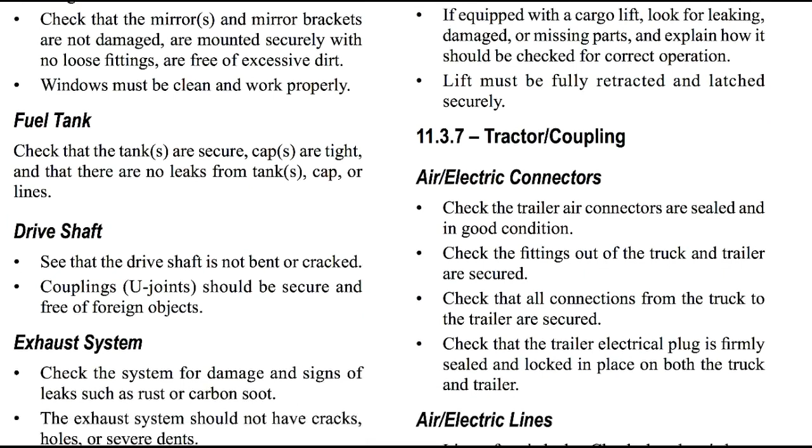Fuel tank. Check that the fuel tank is secure, the cap is tight, and that there are no leaks from the tank, cap, or lines.

Drive shaft. See that the drive shaft is not bent or cracked. Couplings and U-joints should be secure and free of foreign objects.

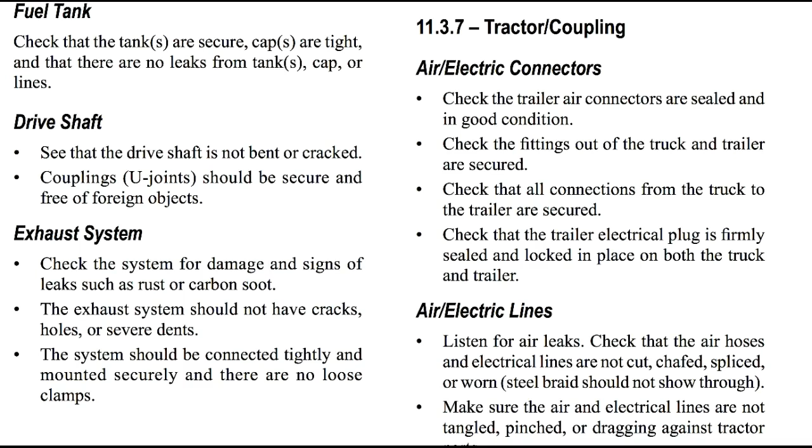The exhaust system, which is important. Check this system for damage and signs of leaks, such as rust or carbon soot. The exhaust system should not have cracks, holes, or severe dents. The system should be connected tightly and mounted securely, with no loose clamps.

Frame. Look for cracks, broken welds, holes, or other damage to the longitudinal frame members, cross members, box, and floor.

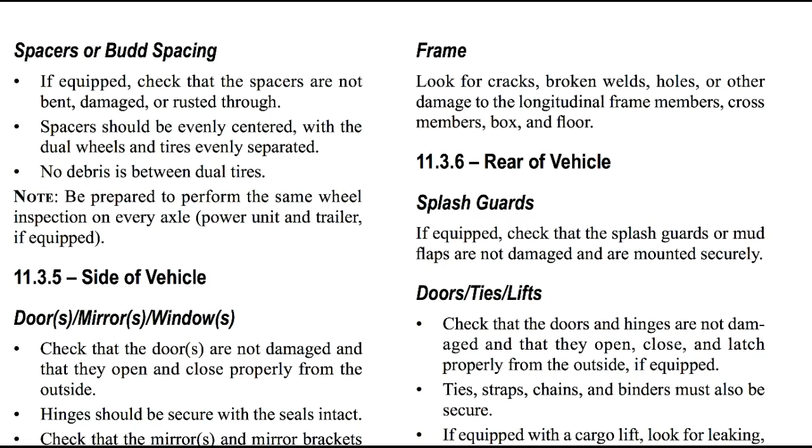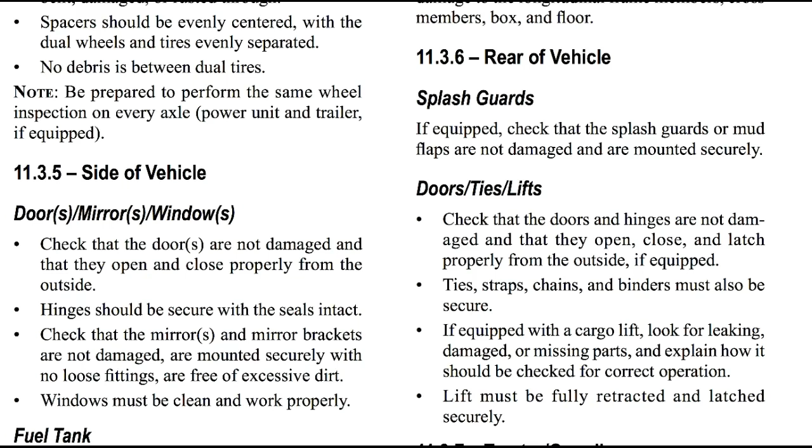Splash guards. This is at the rear of the vehicle. When you're at the rear of the vehicle, check your splash guards. If equipped, check that the splash guards or mud flaps are not damaged and are mounted securely.

Now the doors, the ties, and lifts. Check that the doors and hinges are not damaged and that they open, close, and latch properly from the outside, if equipped. Still at the back of the truck.

Check your ties, straps, chains, and binders. They must be secure. If equipped with a cargo lift, look for leaking, damaged, or missing parts, and check for correct operation. The lift must be fully retracted and latched securely.

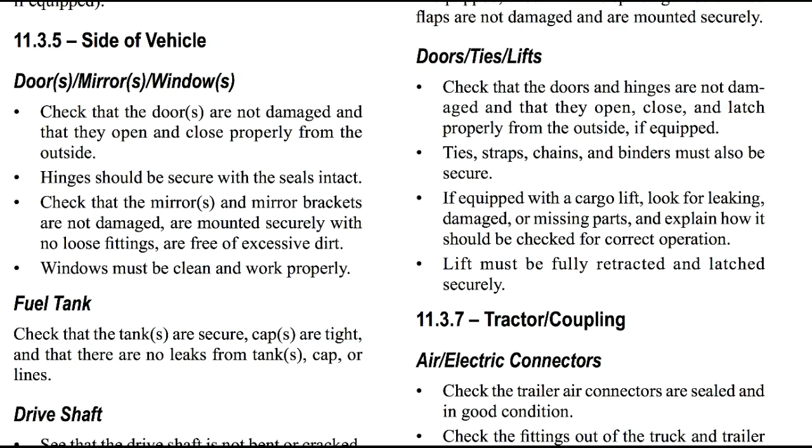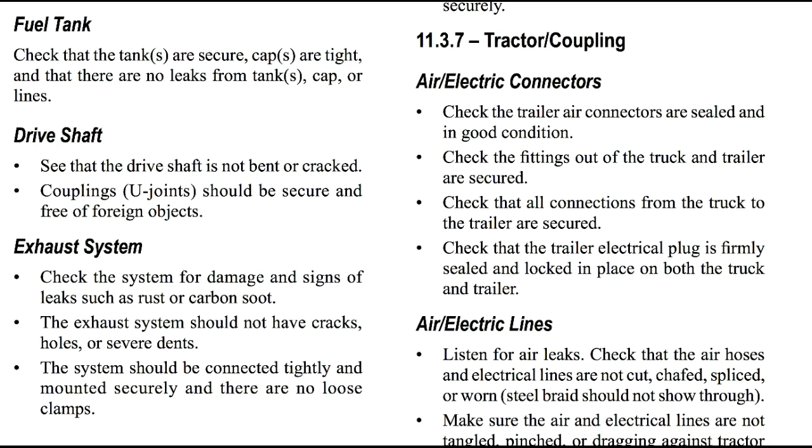Now you're looking at your tractor coupling, air and electric connectors. Check that the trailer air connectors are sealed and in good condition. Check that the fittings on the truck and trailer are secure, and that all connections from the truck to the trailer are secured. Check that the trailer electrical plug is firmly sealed and locked in place on both the truck and trailer.

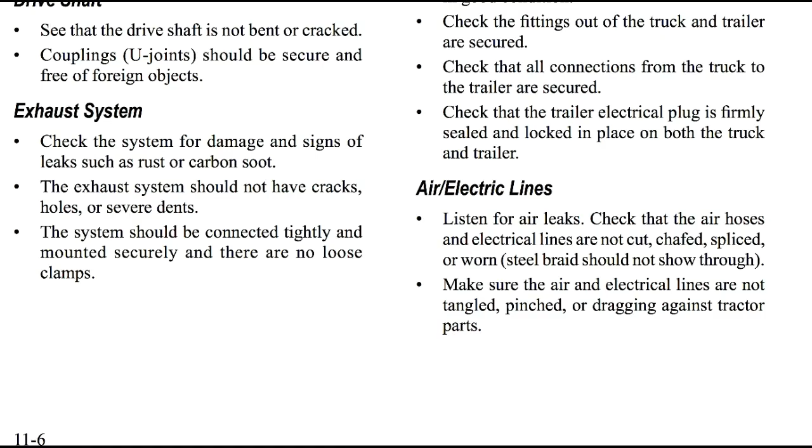Air electric lines. Listen for air leaks. Check that the air hoses and electrical lines are not cut, chafed, spliced, or worn. Steel braid should not show through. Make sure the air and electrical lines are not tangled, pinched, or dragging against the tractor parts.

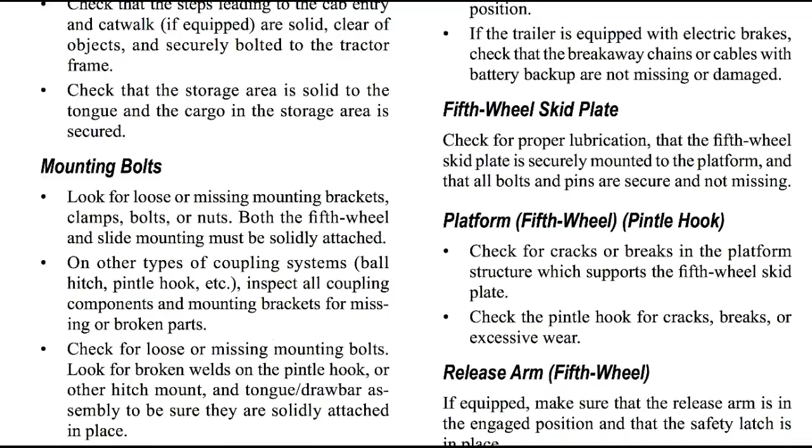Catwalk steps. Check that the catwalk is solid, clear of objects, and securely bolted to the tractor frame. Check that the steps leading to the cab entry and catwalk are solid, clear of objects, and securely bolted to the tractor frame. Check that the storage area is solid to the tongue and that cargo in the storage area is secured. Mounting bolts: look for loose or missing mounting brackets, clamps, bolts, or nuts.

Both the fifth wheel and sliding mount must be solidly attached. On other types of coupling systems, like the ball hitch, pintle hook, etc., inspect all coupling components and mounting brackets for missing or broken parts.

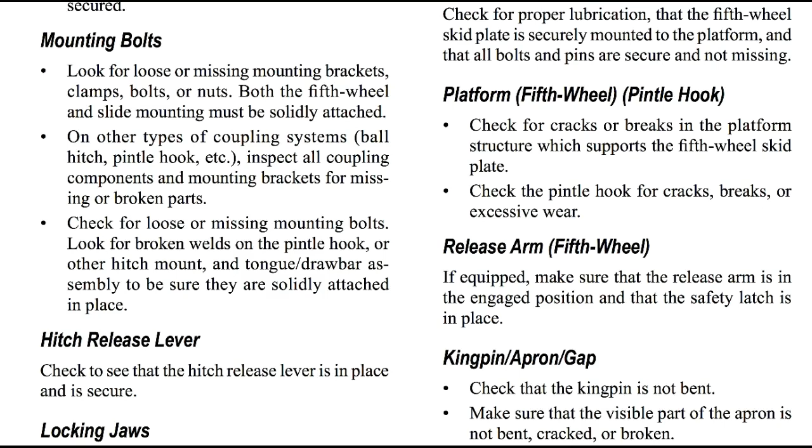Check for loose or missing mounting bolts. Look for broken welds in the pintle hook or other hitch mount, and tongue drawbar assembly, to be sure that they are solidly attached in place.

The hitch release lever. Check to see that the hitch release lever is in place and secure. The locking jaws: look into the fifth wheel gap and check that the locking jaws are fully closed around the kingpin. On other types of coupling systems, like the ball hitch, pintle hook, etc., inspect the locking mechanism for missing or broken parts and make sure it's locked securely.

If present, safety cables or chains must be secure and free of kinks and excessive slack. The safety devices: check that the latch is secured and locked in place, and that the cotter pin is not missing, is in place, and not damaged.

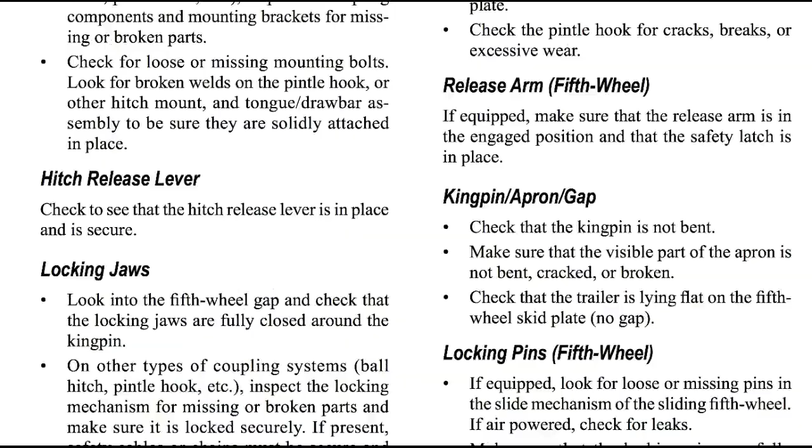Safety chains must be hooked and crisscrossed, free of kinks and excessive slack. Cotter pins to hook must be in place, with the hooks secured and pointing in an outward position. If the trailer is equipped with electric brakes, check that the breakaway chains or cables with battery backup are not missing or damaged.

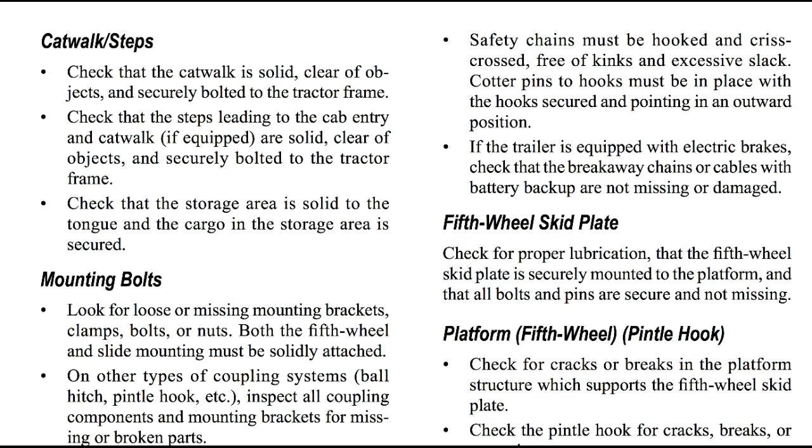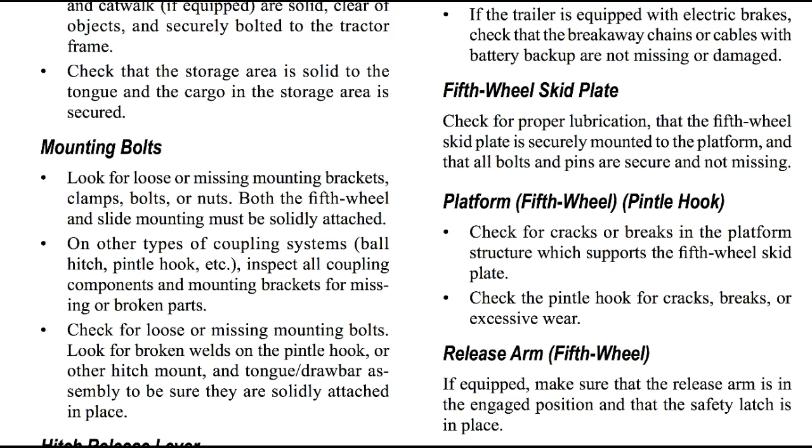And the fifth wheel skid plate: check for proper lubrication, that the fifth wheel skid plate is securely mounted to the platform, and that all bolts and pins are secure and not missing.

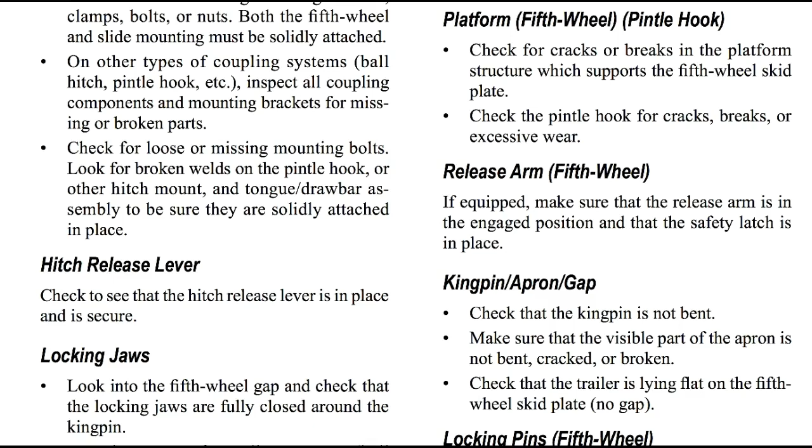Platform fifth wheel pintle hook. Check for cracks or breaks in the platform structure which supports the fifth wheel skid plate. Check the pintle hook for cracks, breaks, or excessive wear, and the release arm on the fifth wheel. If equipped, make sure that the release arm is in engaged position and that the safety latch is in place.

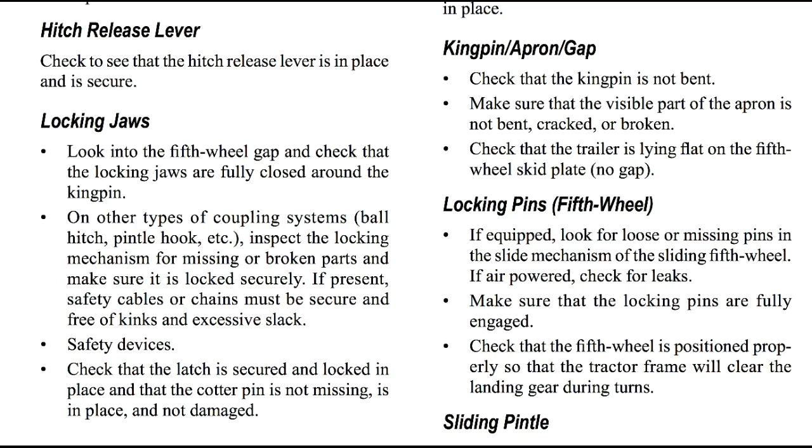Kingpin apron gap. Check that the kingpin is not bent. Make sure that the visible part of the apron is not bent, cracked, or broken. Check that the trailer is lying flat on the fifth wheel skid plate with no gap.

Locking pins on the fifth wheel. If equipped, look for loose or missing pins in the slide mechanism of the sliding fifth wheel. If air-powered, check for leaks. Make sure that the locking pins are fully engaged. Check that the fifth wheel is positioned properly so that the tractor frame will clear the landing gear during turns.

Sliding pintle. Check that the sliding pintle is secured with no loose or missing nuts or bolts and that the cotter pin is in place.

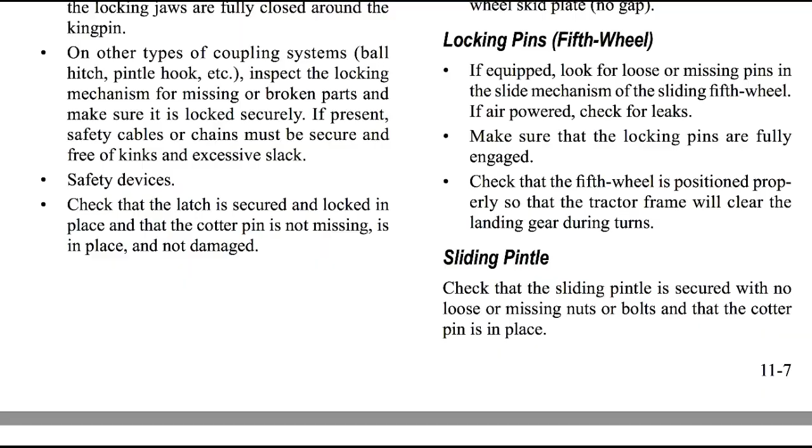Tongue and drawbar. Check that the tongue drawbar is not bent or twisted and check for broken welds and stress cracks. Check that the tongue drawbar is not worn excessively.

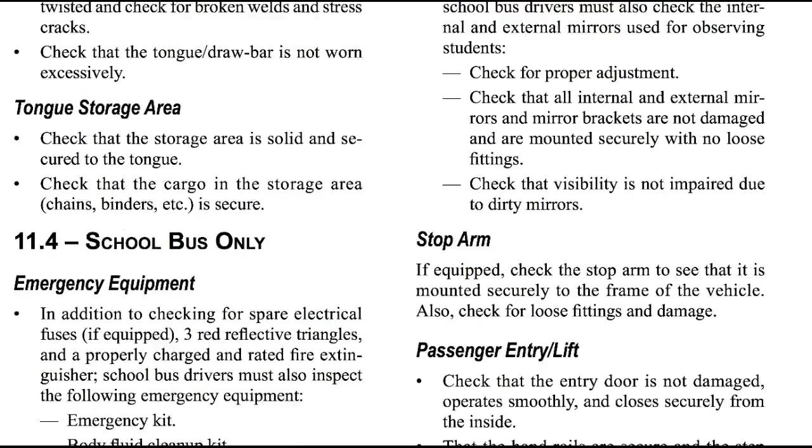Tongue storage area. Check that the storage area is solid and secured to the tongue. Check that the cargo is in the storage area, like chains, binders, etc., and check that they're secure.

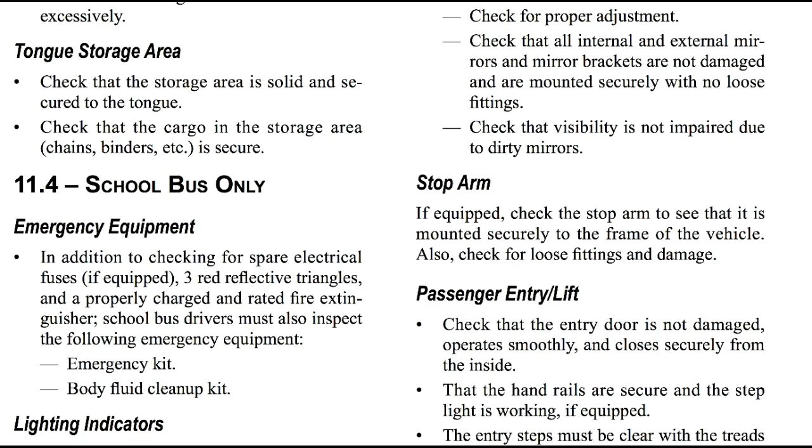Now for school buses only. Emergency equipment. In addition to checking for spare electrical fuses, 3 red reflective triangles, and a properly charged and rated fire extinguisher, school bus drivers must also inspect the following emergency equipment: an emergency kit and a body fluid cleanup kit.

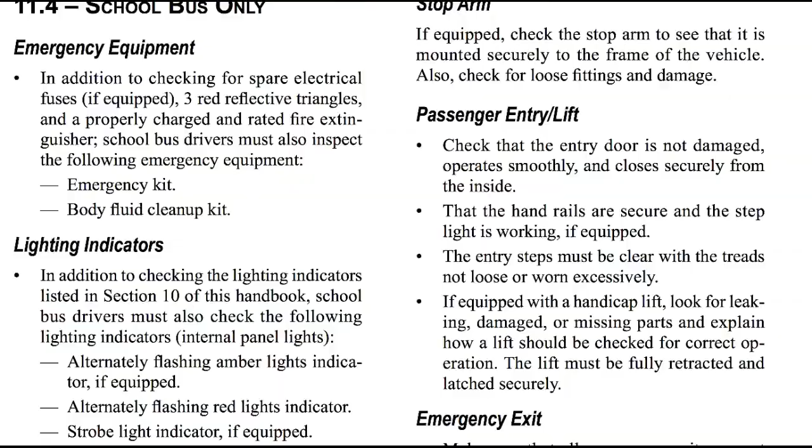Lighting indicators. In addition to checking the lighting indicators listed in Section 10 of this video series, school bus drivers must also check the following lighting indicators: the internal panel lights, the alternately flashing amber lights indicator if equipped, the alternately flashing red lights indicator, and the strobe light indicator if equipped.

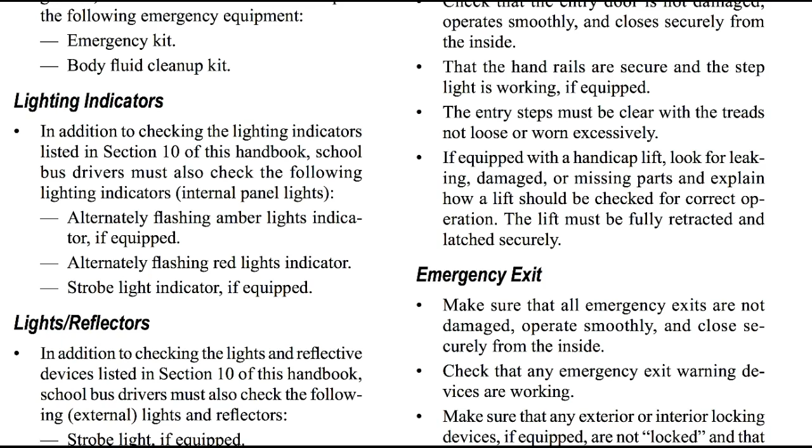Lights and reflectors. In addition to checking the lights and reflective devices section in Section 10 of this video series, school bus drivers must also check the following: strobe light if equipped, stop arm light if equipped, alternately flashing amber lights if equipped, and alternately flashing red lights.

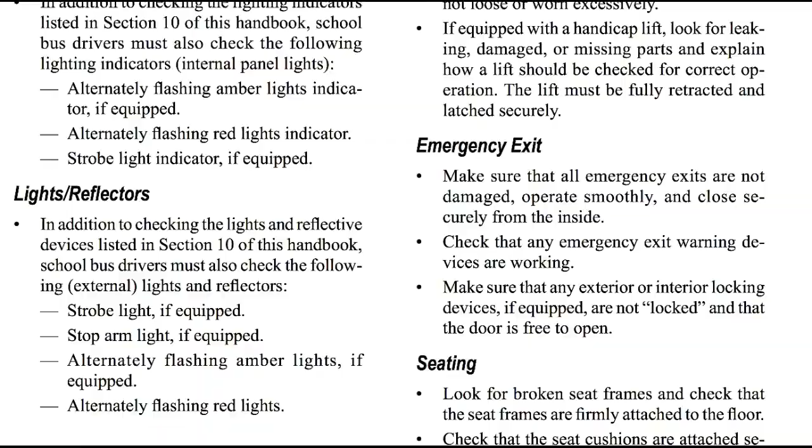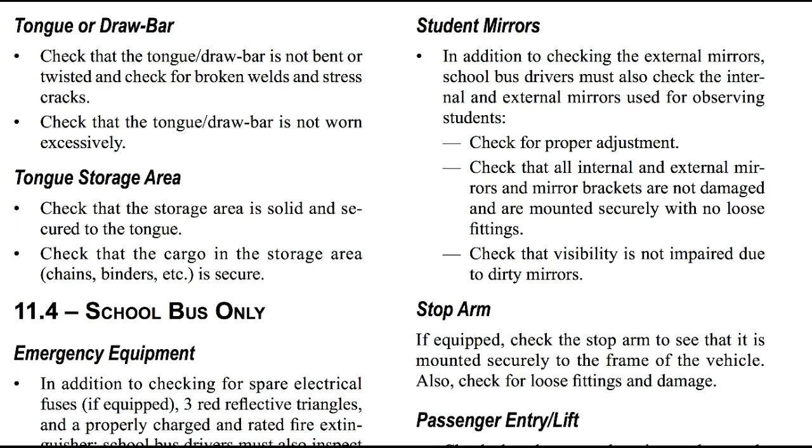Also, let's talk about student mirrors. In addition to checking the external mirrors, school bus drivers must also check the internal and external mirrors used for observing students. Check for proper adjustment. Check that all internal and external mirrors and mirror brackets are not damaged and are mounted securely with no loose fittings. Check that visibility is not impaired due to dirty mirrors.

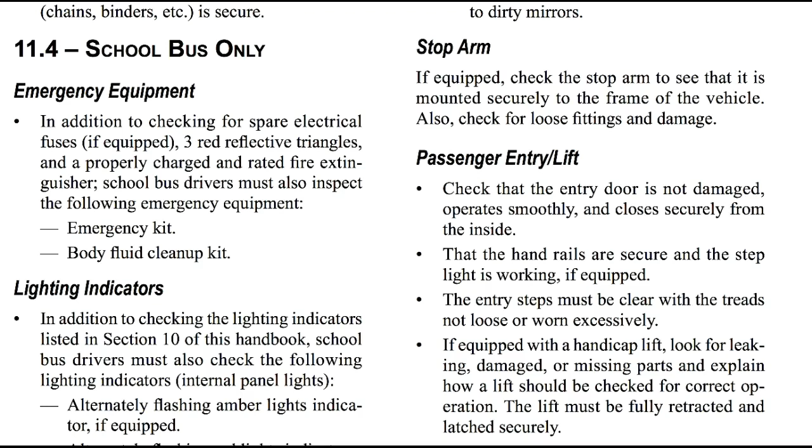The stop arm. If equipped, check the stop arm to see that it is mounted securely to the frame of the vehicle. Also check for loose fittings and damage.

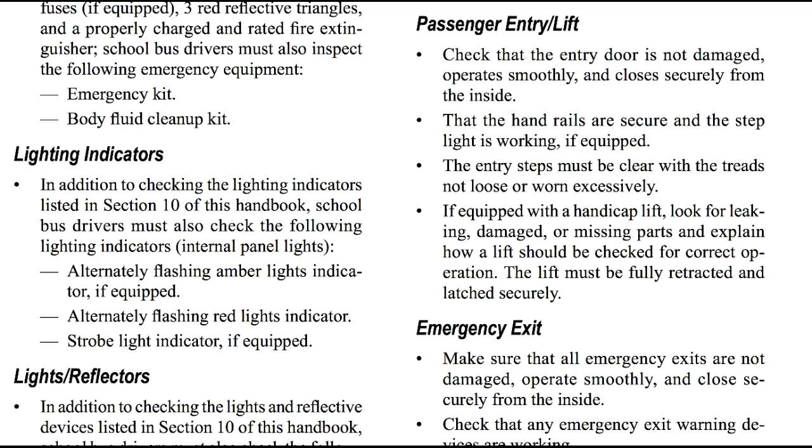Passenger's entry lift. Check that the entry door is not damaged, operates smoothly, and closes securely from the inside. Check that the handrails are secure and the step light is working if equipped. Check the entry steps - they must be clear with the treads not loose or worn excessively. If equipped with a handicap lift, look for leaking, damaged, or missing parts and check for correct operation. The lift must be fully retracted and latched securely.

Emergency exit. Make sure that all emergency exits are not damaged, operate smoothly, and close securely from the inside. Check that the emergency exit warning devices are working. Make sure that any exterior or interior locking devices, if equipped, are not locked and that the door is free to open.

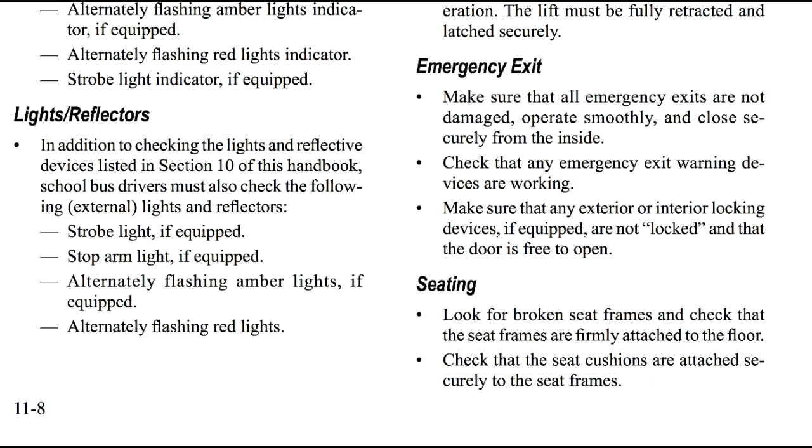Seating. Look for broken seat frames and check that the seat frames are firmly attached to the floor. Check that the seat cushions are attached securely to the seat frames.

Trailer, section 11.5, trailer front. Air and electrical connections. Check that the trailer air connectors are sealed and in good condition. Make sure that the glad hands are locked in place and free of damage or air leaks. Make sure that the trailer electrical plug is firmly seated and locked in place.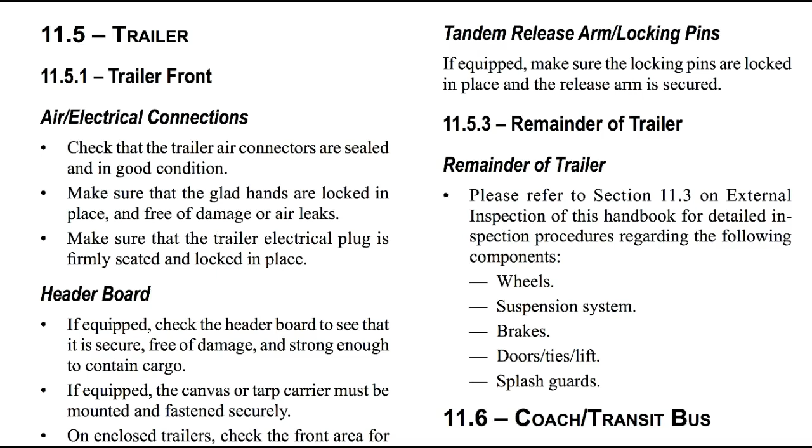Header board. If equipped, check the header board to see that it is secure, free of damage, and strong enough to contain cargo. If equipped, the canvas or tarp carriers must be mounted and fastened securely. On enclosed trailers, check the front area for signs of damage such as cracks, bulges, holes, or missing rivets.

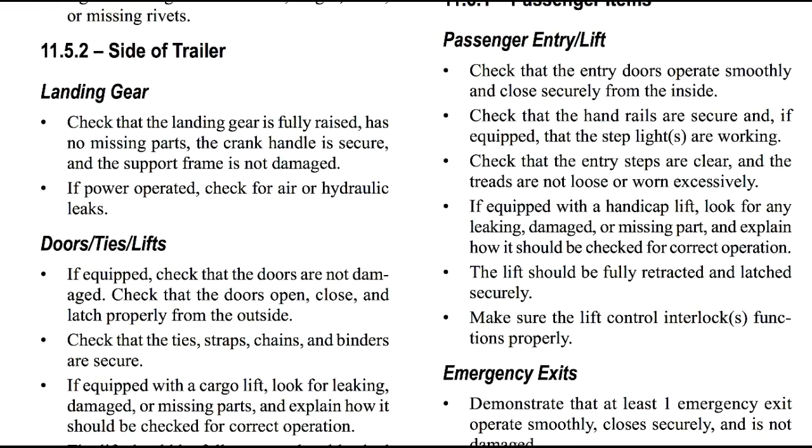The side of the trailer. The landing gear. Check that the landing gear is fully raised, has no missing parts, the crank handle is secure, and the support frame is not damaged. If power operated, check for air or hydraulic leaks.

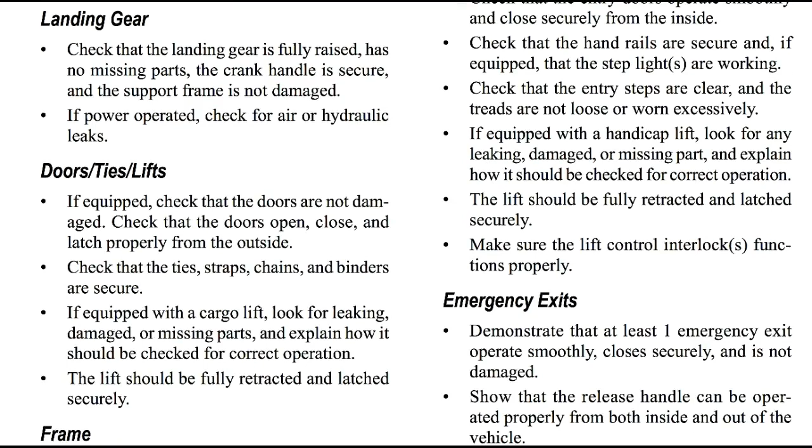The doors, the ties, and the lifts on the trailer. If equipped, check that the doors are not damaged. Check that the door opens, closes, and latches properly from the outside. Check that the ties, straps, chains, and binders are secure. If equipped with a cargo lift, look for leaking, damage, or missing parts and check for correct operation. The lift should be fully retracted and latched securely.

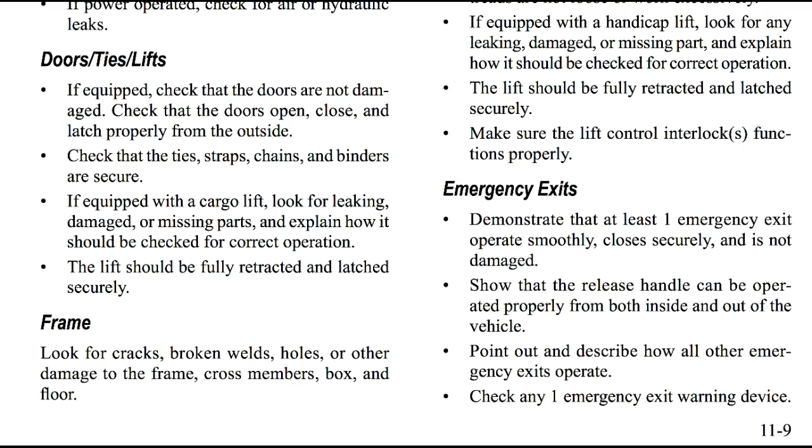Frame. Look for cracks, broken welds, holes, or other damage to the frame, cross members, box, and floor. Tandem release arm locking pins. If equipped, make sure the locking pins are locked in place and the release arm is secure.

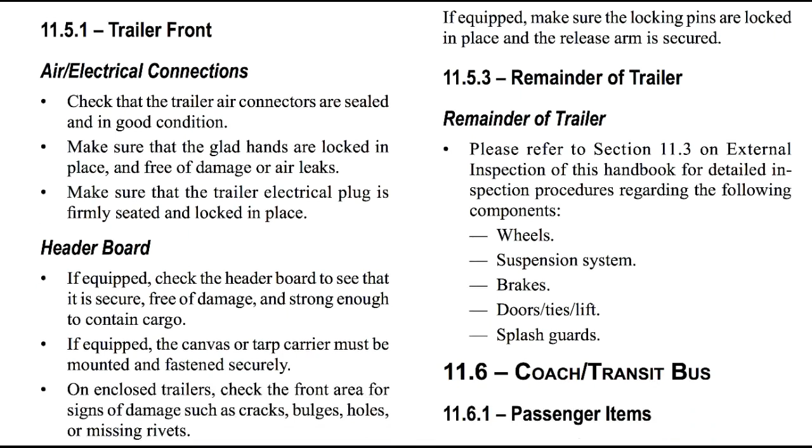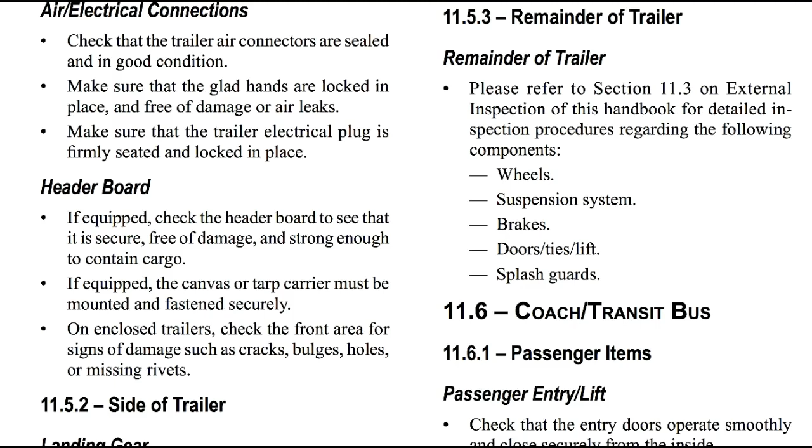The remainder of the trailer. Please refer to section 11.3 on external inspection in this video series for detailed inspection procedures regarding the wheels, the suspension system, the brakes, the doors, the ties, the lifts, and the splash guards.

11.6 Coach Transit Bus, Passenger Items. Passenger entry lift: check that the entry doors operate smoothly and close securely from the inside. Check that the handrails are secure and, if equipped, that the step lights are working. Check that the entry steps are clear and the treads are not loose or worn excessively.

If equipped with a handicap lift, look for any leaking, damaged, or missing parts and check for correct operation. The lift should be fully retracted and latched securely. Make sure the lift control interlock functions properly.

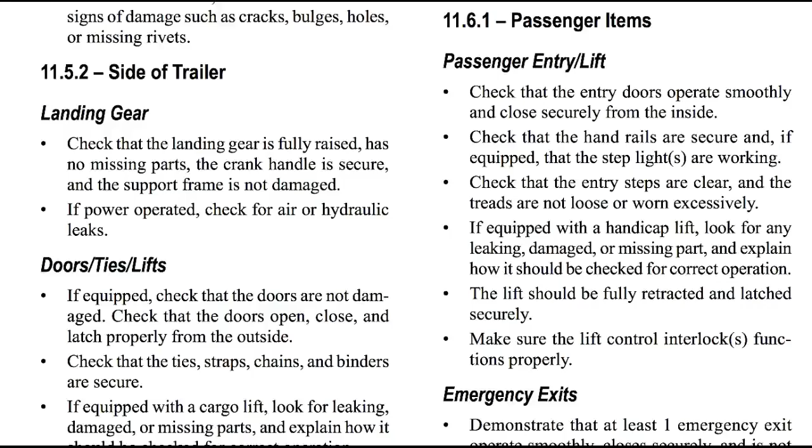Emergency exits: demonstrate that at least one emergency exit operates smoothly, closes securely, and is not damaged. Show that the release handle can be operated properly from both inside and outside the vehicle. Point out and describe how all other emergency exits operate, and check any one emergency exit warning device.

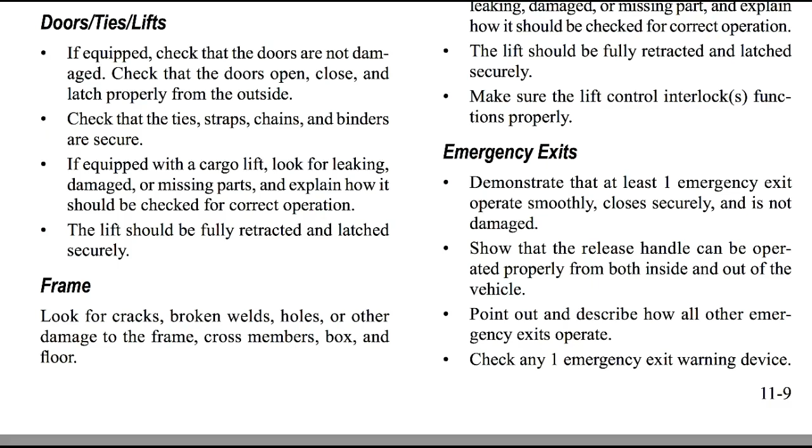Passenger seating: look for broken seat frames and check that the seat frames are firmly attached to the floor. Check that the seat cushions are attached securely to the seat frames.

Entry and exit doors and mirrors. Check that the entry-exit doors are not damaged and operate smoothly from the outside. The hinges should be secured with seals intact. Make sure that the passenger exit mirrors, all external mirrors, and mirror brackets are not damaged and are mounted securely with no loose fittings.

External inspection of the coach or transit bus. Level air leaks: see that the vehicle is sitting level, front and rear, and if air equipped, check for audible air leaks from the suspension system.

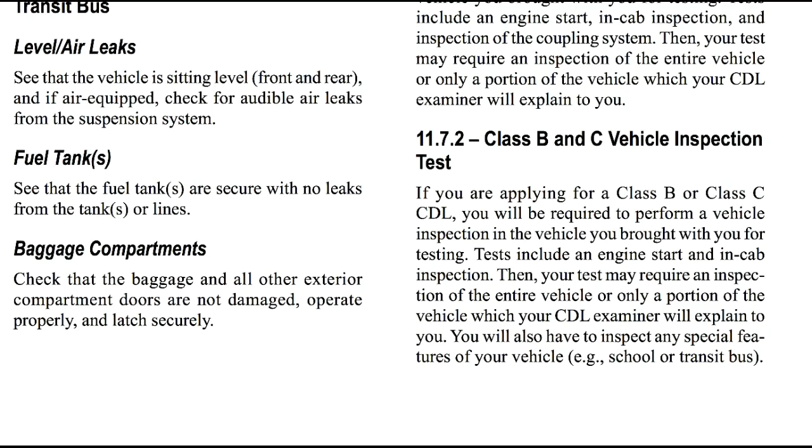The fuel tanks: see that the fuel tanks are secure with no leaks from the tanks or lines. The baggage compartment: check that the baggage and all other exterior compartment doors are not damaged, operate properly, and latch securely. The remainder of the coach transit bus, the remainder of the vehicle.

Please refer to section 11.3 on external inspection in this video series, which was the last video, for detailed inspection procedures for the remainder of the vehicle. Remember, the vehicle inspection test must be passed before you can proceed to the basic vehicle control skills test.

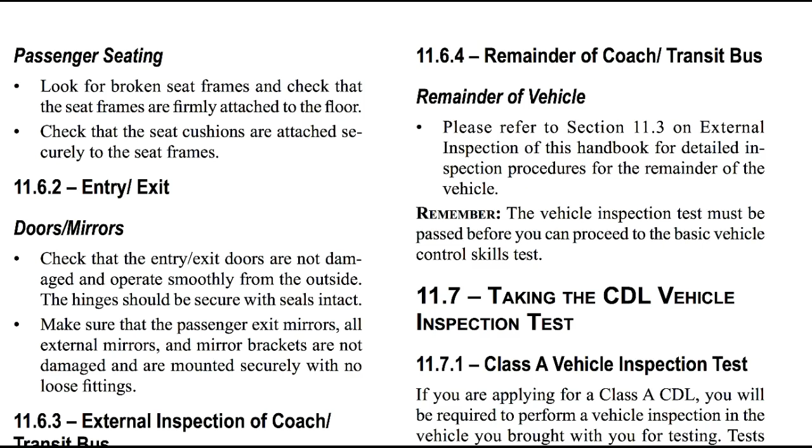11.7, taking the CDL vehicle inspection test. For a Class A vehicle inspection test, if you are applying for a Class A CDL, you will be required to perform a vehicle inspection on the vehicle you brought for the test. Tests include an engine start, in-cab inspection, and inspection of the coupling system. Your test may require an inspection of the entire vehicle or only a portion of the vehicle, which your CDL examiner will explain to you.

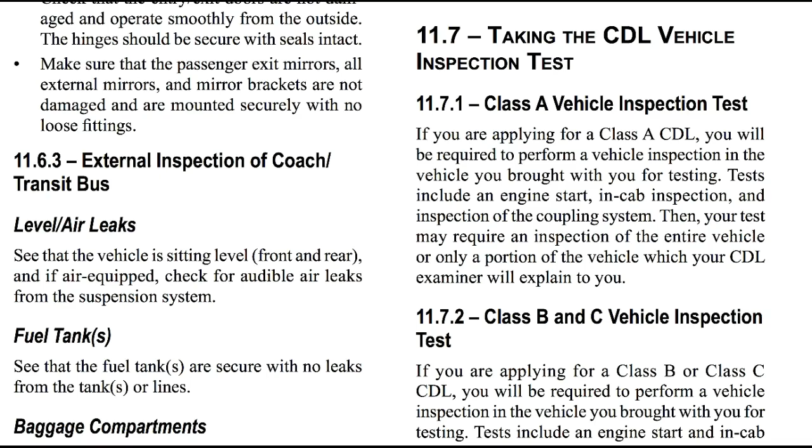For a Class B and C vehicle inspection test, if you are applying for a Class B or Class C CDL, you will be required to perform a vehicle inspection on the vehicle you brought for testing. The tests include an engine start and in-cab inspection. Your test may require an inspection of the entire vehicle or only a portion of the vehicle, which your CDL examiner will explain to you. You will also have to inspect any special features of your vehicle.

We have completed Section 11.

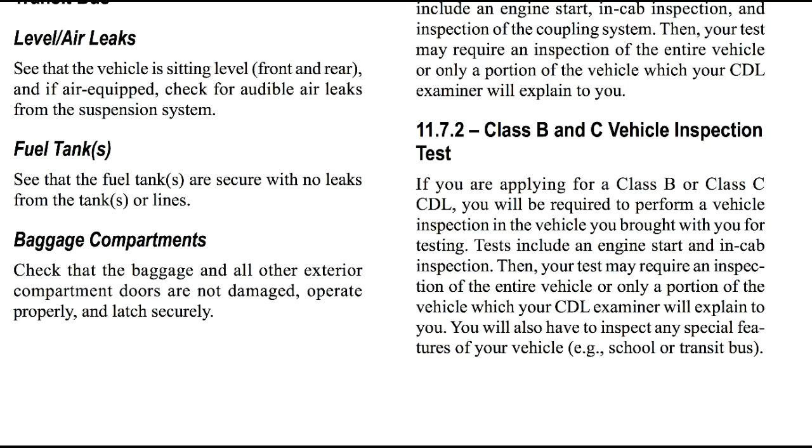I'd like to give you a personal testimony of my CDL DMV test. When I went there and took the pre-trip inspection test, I went down every part of the vehicle because I couldn't remember everything, so I just pointed at everything I saw and said, 'You want to check this for damage? You want to check this doorknob for damage? You want to check these paint chips for damage? You don't want paint flying off.' I kept the inspector there for a very long time, and he was getting quite annoyed with me pointing out every part of the vehicle.

I figured if I talked about every part of the vehicle and pointed out every single detail, regardless of what it was, around the entire vehicle, then I would pass it. And I did pass it. However, I did miss a few things. I also thought that if you show a thorough understanding, the inspector might go lenient on you. But it turns out it's a totally controlled test—they just have a checklist in their hand, waiting for you to mention everything on it. You may forget something and miss a point, or you may not miss anything and have a perfect test. But anyway, I did pass the test.